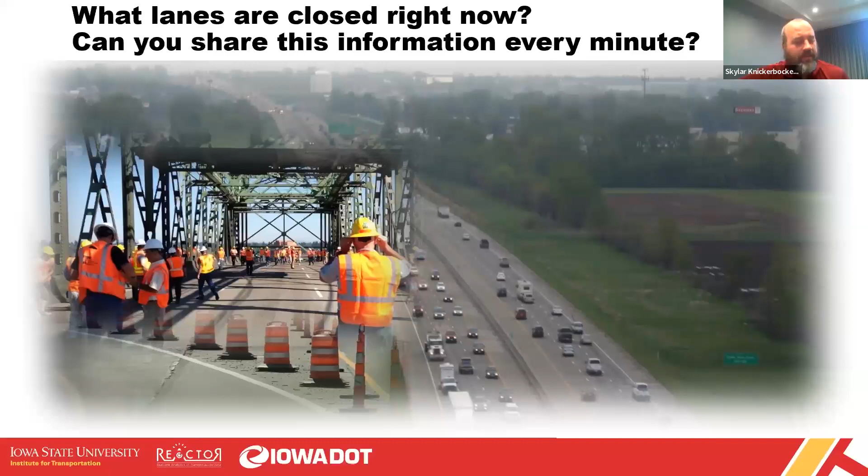And then just reiterating what Ross and Mike said, there's inaccuracies in the data. I often go to various state DOTs whenever I'm out traveling and presenting, and it's pretty easy, if you can see both cameras and the work zones that they put out there, that there's inaccuracies. Here in Iowa is just a screenshot of one that I was able to find within a couple minutes, where we said we're going to reduce it to one lane, and the project was going to start at 9 p.m. But we're almost an hour later and there's no lane closure in sight.

So how do we not lose the confidence of who we're providing this data to, to say, okay, we actually know whether that work zone is actually out there because we verified it, or it's just estimated because we're planning on working out there, but we don't know if it's actually out there or not at this time. Next slide.

And the challenge is we know that we can't ask our field staff to be able to provide this information. The motivation, or the comments probably 10 years ago, was, well, let's just give them another form to fill out and tell us whenever they're out there working. But they're more focused on the concrete being laid, the rebar, getting tickets and different things like that, that this isn't their main focus, the traffic control and being able to have accurate information.

So if you go to the next slide, where we then transition to is looking at ways that we can automatically collect this, using more of an IoT approach, where we have different devices and sensors out there that we know where they'll be placed, and that we can get that information off those devices to have confidence and verification that the work zone's actually out there, and improve the overall accuracy of our data.

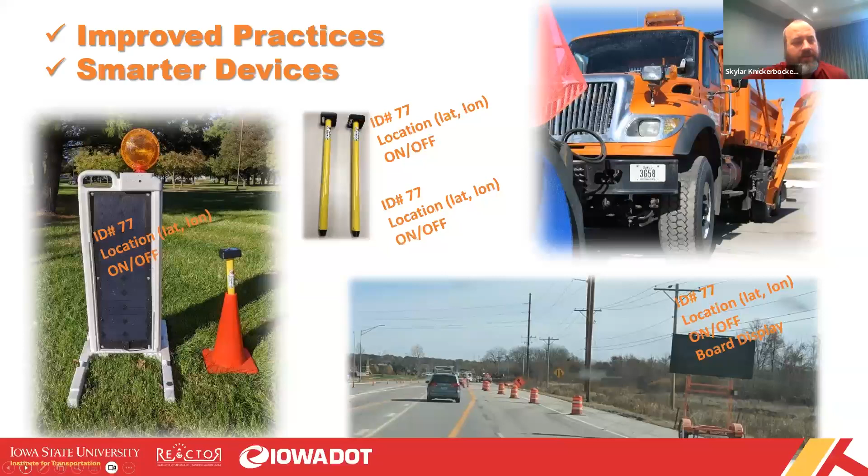And this is just a sampling of the devices. I'll talk about a few other ones that we're testing out at the end. But next slide. Where we really focused was on the smart arrow board deployment.

And Mike said that we started small, and really the reason we started small was we knew that this was going to require commitment from our contractors, and it's going to require them to procure resources and be able to buy these devices and build up their inventory and fleet. So that's where we started on just the interstates, and wanted to test things out with just the interstates, and then further expand that to all projects in 2022.

The other reason we started with the arrow boards is because it really doesn't require any training or changes in the field. The people in the field are still just flipping the switch to what the pattern is, and then we just start getting that data on the back end to the DOT.

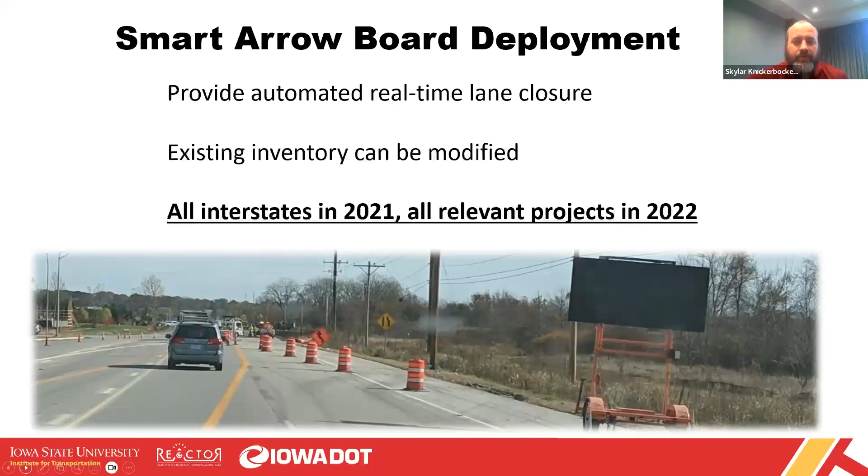And then the other nice thing was that we could modify all of our existing inventory, and it wasn't requiring all the contractors to go out and buy brand new arrow boards. They could still use the arrow boards they have and just add on a component, which makes it smart to be able to communicate with us. Next slide.

And unfortunately, we started this effort before there was the work zone data exchange device feed. So we could only have dreamt of having a WZDx device feed at that time. So what we did was we actually developed our own kind of homegrown smart arrow board protocol is what we called it. And that's what we use to give to the vendors to say, here's the data format that we want. And it's nearly identical for the most part to the WZDx device feed.

But it was really kind of starting to lay that groundwork, along the lines of what MassDOT was doing, to really generate that device feed and get that arrow board data in a standard format, regardless of what manufacturer was providing that arrow board. Next slide.

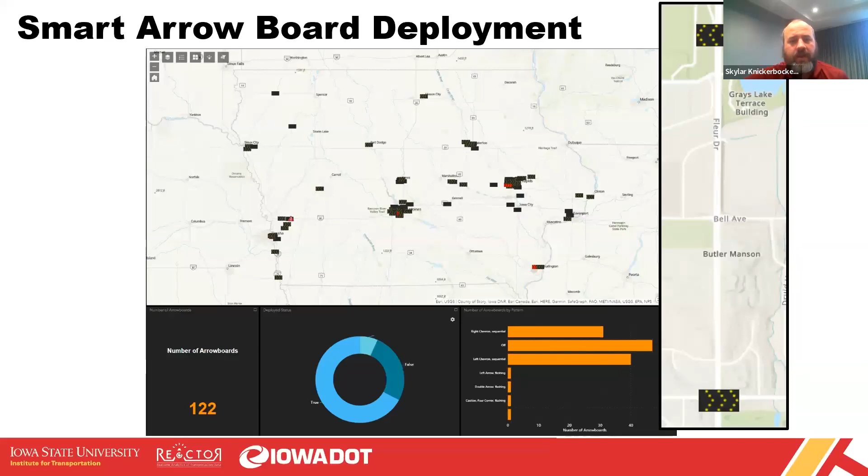Now that talks about all of our devices, and I'm going to start to transition now to the actual work zone information, because ultimately it's great to get this data and to be able to have confidence that we know where the work zones are, and it's used throughout the DOT. But really our goal is to get the information to the driver, so that we can alert them ahead of time that there is a work zone ahead, and giving that confidence to the third parties as well, that we know that there's a verified work zone. So next slide. And how we've accomplished this is through our work zone data exchange.

We received a demonstration grant in Iowa to create a WZDx, and really the two main points that we did through the demonstration grant was we first created WZDx based on our existing work zones in our ATMS. So it was a more fully featured WZDx that provides the latest data that is entered into our ATMS by our operators.

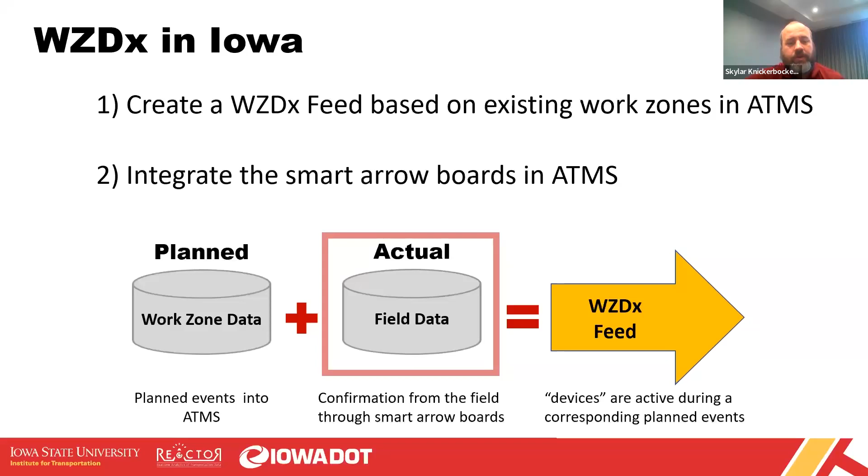And then the second part of our effort was to integrate these smart arrow boards that I was talking about. So we can take the planned work zones that our operators are already submitting, marry up the smart arrow boards that are associated to those work zones, and produce that WZDx feed that has the verified information of where those work zones start. Next slide.

And this just summarizes kind of the benefits that we see of having the WZDx plus the smart arrow boards. Whenever we have an arrow board associated with a work zone, we show that the location is verified in the WZDx feed. So a third-party consumer that is taking this data knows that we have high confidence that there's a GPS equipped device out there that's collecting and providing that information used to update it.

This system is also set up so that if that arrow board leaves that work zone or goes outside of the extents of the work zone, then it gets disassociated with the work zone, and that work zone will go back to its estimated status or whatever it would have been if there wasn't an arrow board located there. So we still have the ability to show that estimated information, but supplementing that with the arrow board information.

And ultimately, our goal is just to improve safety and mobility through our work zones by being able to communicate to drivers most effectively what's out there on our roadways. So next slide.

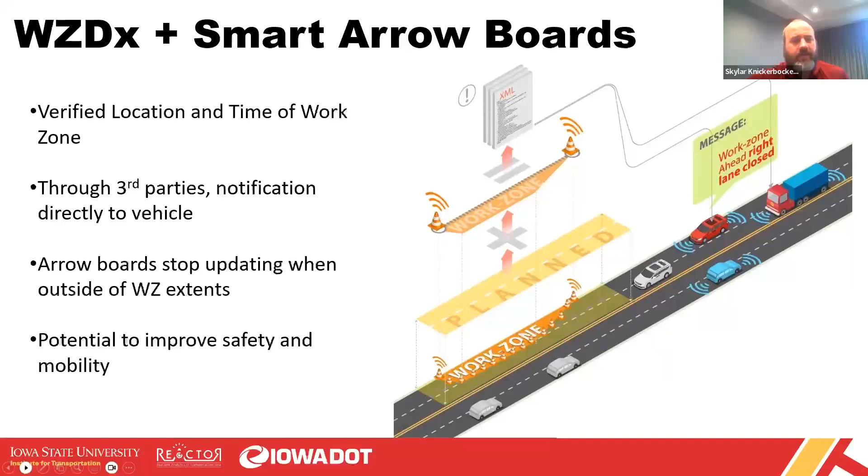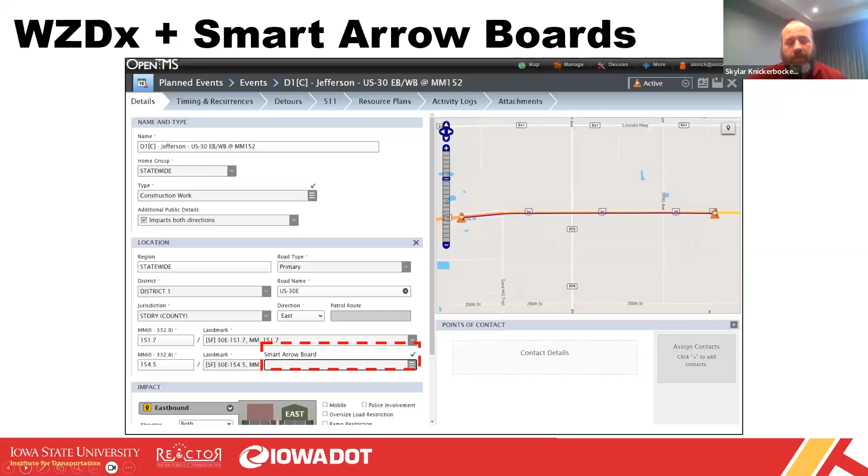And once they assign an arrow board to that work zone, as I mentioned before, it'll continue to update that work zone with its location. And if it's a reoccurring work zone where they work tonight from 8 p.m. to 5 a.m., it'll continue to follow it as they move that arrow board on and off the job and show it as verified whenever it's actually out there on the roadway. Next slide.

This is public facing, so we had to remove some of the technical aspects of it and just give them the basic information of what it is. But it's just another way for us to communicate out the work zone information to a different audience beyond just the WZDx, but using the same system on the back end. Next slide.

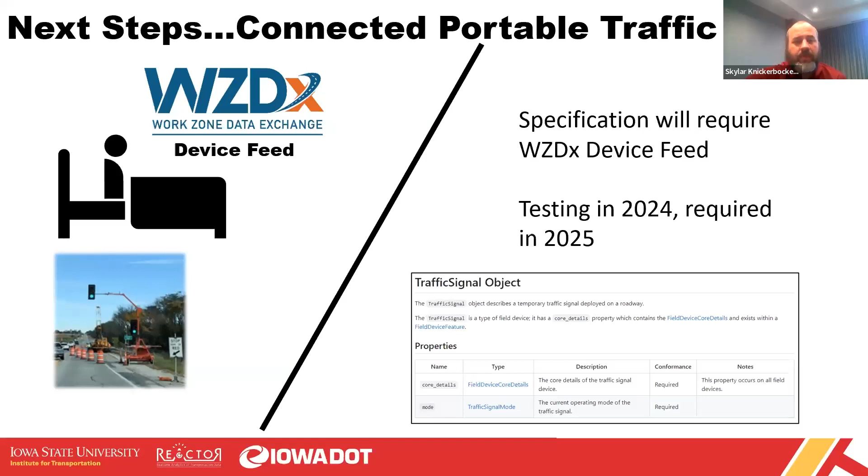Again, this long leeway is really just to give the contractors enough time to start procuring the secure equipment for us to test it and really hit the ground running in 2025. Next slide. And this is just a slide showing all the different devices that we're also testing. We've been focused on the arrow boards and connected portable signals because they're easy and low hanging fruit.

But there's a lot of these other devices out there on the market that are going to be coming to Iowa and to other states, where we can actually use those and integrate these into our data feeds and into our WZDx work zone feeds. Just a few to note are the portable rumble strips from iCone. They provide a box for you to locate those. There's things that go on the back of signs that whenever you set them down and whenever you put it up, you get a notification that the sign's been put up.

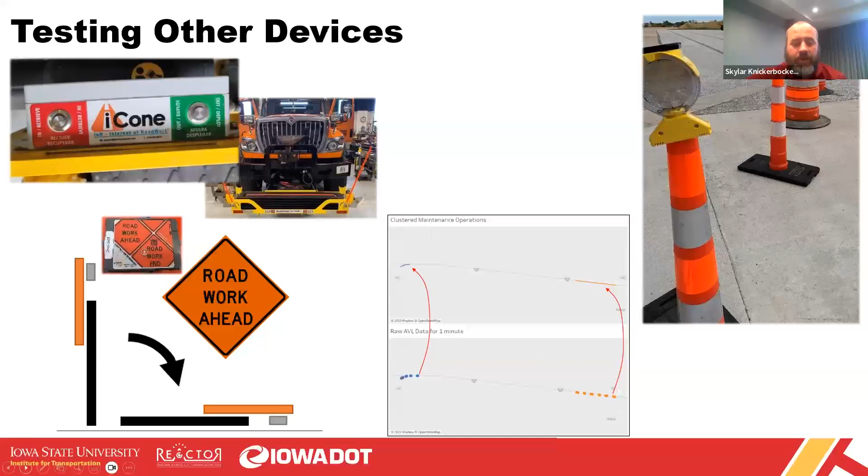So we're looking at that to provide the start location for work zones where we don't have smart arrow boards. And then also just using our AVL equipment where we know where those trucks are located. If they meet a certain criteria, we can safely assume that they're in a maintenance operation that we can then provide out through our WZDx device feed. Next slide. Yep, I think that's it.